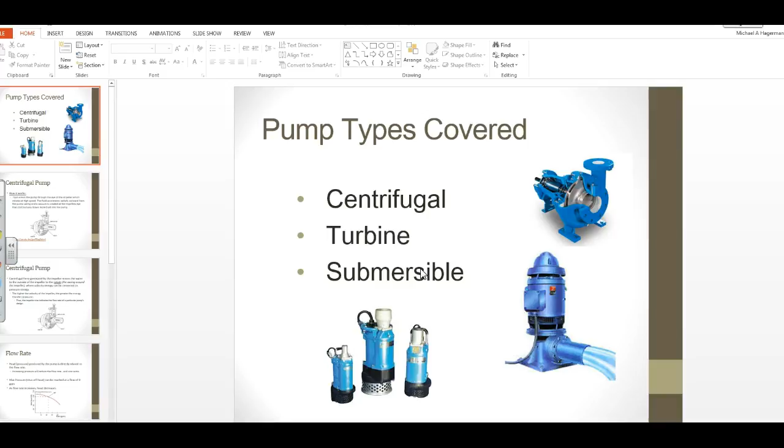So again, they all work with centrifugal force. I think we're all fairly aware of what centrifugal force is, but basically it's the force created with a circular movement - the further out from the center, the greater the centrifugal force. So the larger the diameter of the bowl assembly, that intake unit, this is the bowl right here, the larger that thing is, the greater capacity we have with that pump.

Of course, larger bowls will generally require larger horsepower, more power to drive the things. Fluid enters the pump - the water is going to enter through the eye of the impeller, which is just the center point. Oftentimes I use impeller and bowls interchangeably, that's pretty common. So this is the impeller, and this is the eye of the impeller where the fluid enters.

Of course, that bowl is rotating. Water is going to be, the centrifugal force moves the water outward, and the casing area on the outside of the bowl or the impeller, this furthest exterior area is called the volute. So the pressurized water is sent to the volute, and that centrifugal force moves the water out. Simultaneously, we're creating areas of lesser pressure where our velocities are the highest, which is actually just on the back side of the impeller fin - I was talking about velocity and pressure relationships.

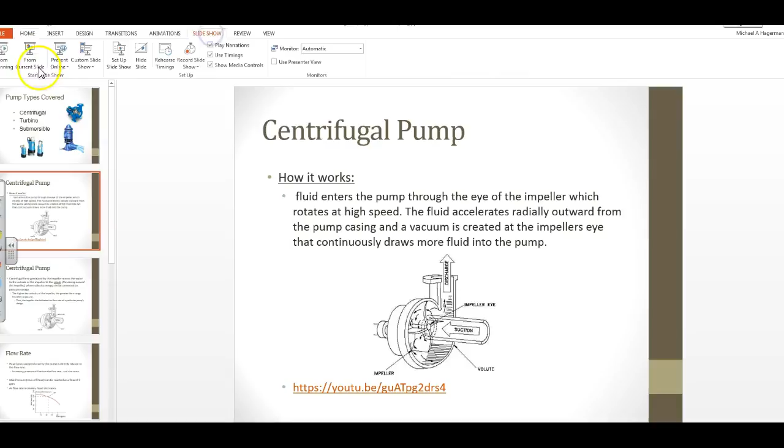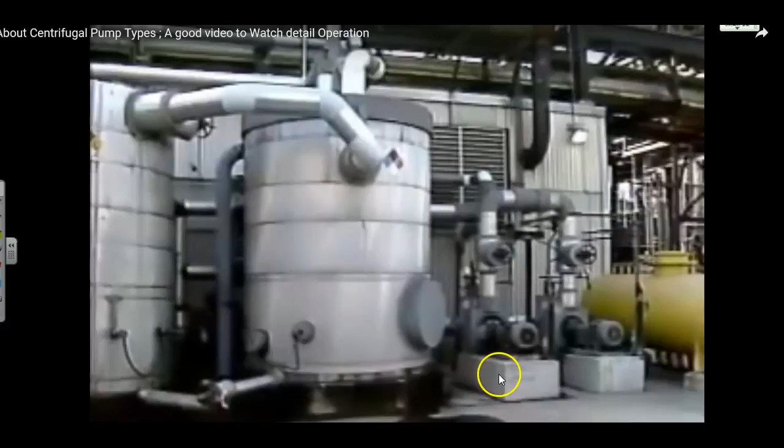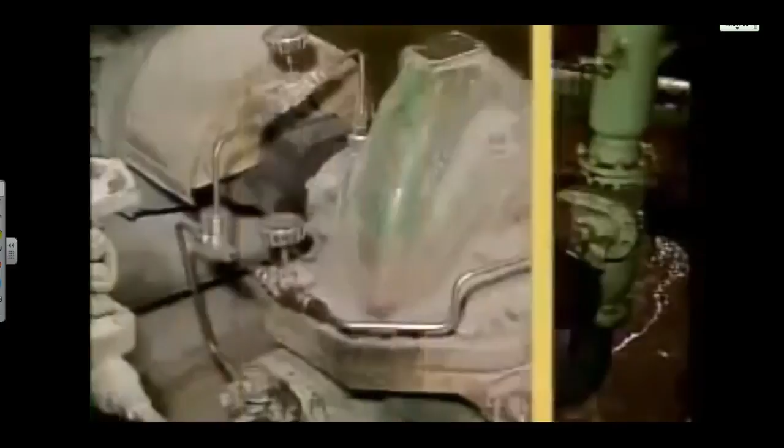Plants use many types of pumps to move process liquid. One of the most common types of pumps in use today is a centrifugal pump. A centrifugal pump uses one or more impellers to create a centrifugal force that pushes the process liquid through the pump. While there are different types of centrifugal pumps, they can be grouped into two basic categories: single-stage pumps and multi-stage pumps.

A single impeller or multiple impellers use centrifugal force to move liquids. Centrifugal force is the force that exists when an object or material moves in a circular motion. This force causes the object or material to move outward, away from the center of rotation. In a centrifugal pump, what moves outward is the process liquid.

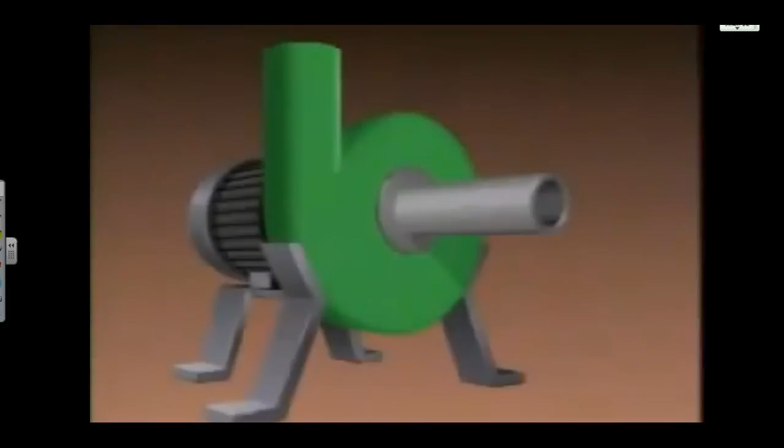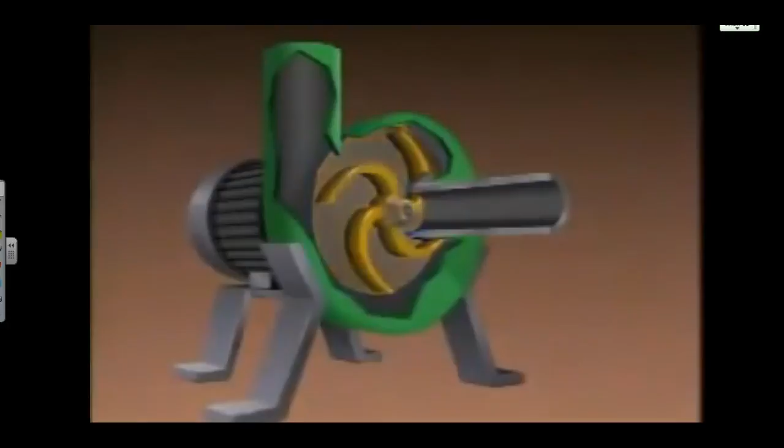We can see how a centrifugal pump works using this simplified illustration. All centrifugal pumps have an inlet, a casing, and an outlet. Inside the pump's casing is an impeller. It has a series of curved vanes that extend out from its center. The pump's casing is designed so that the area around the impeller creates a gradually widening spiral channel. This widening channel is known as the volute.

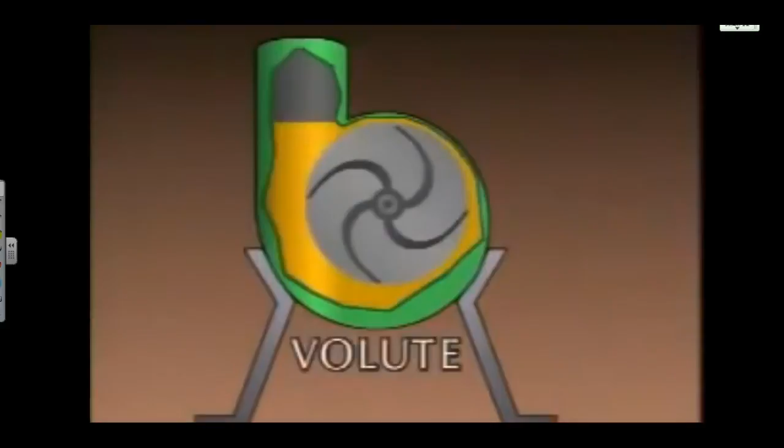Since this pump has only one impeller and one volute, it is referred to as a single-stage pump.

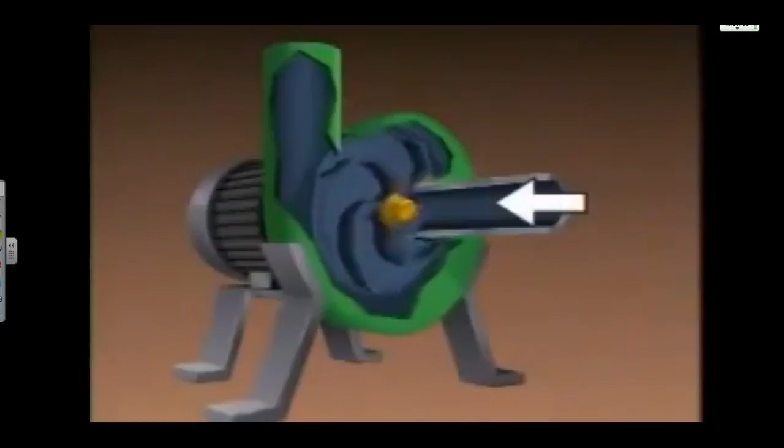During operation, a driver motor rotates the impeller, creating a centrifugal force that throws the process liquid outward into the volute. The outward movement of the liquid causes two things to happen. First, it creates a reduced pressure area at the suction eye of the impeller. This area of lower pressure draws more liquid into the pump and provides a constant flow of liquid. Second, it causes the liquid to gain speed.

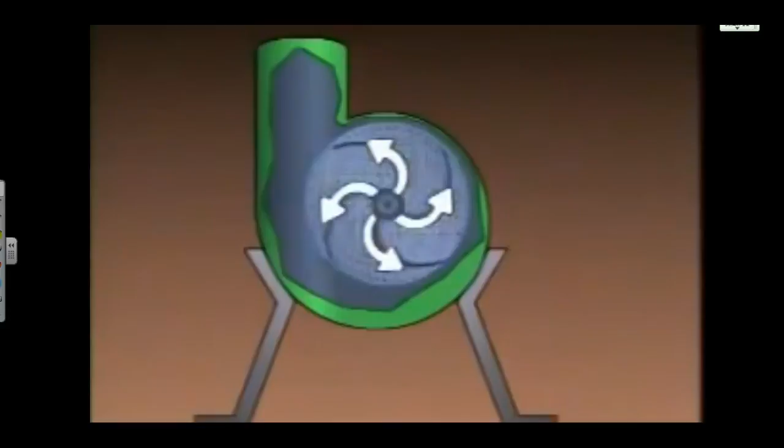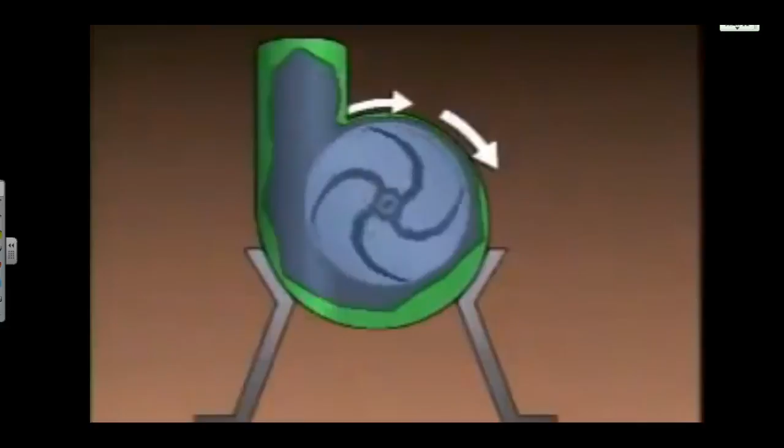This happens because as the liquid is forced to the outside of the rotating impeller, it must move faster to keep up with the impeller. As the liquid flows away from the impeller, it spreads out to fill the volute. The expansion in the volute causes the liquid to slow down and its pressure to increase. The increased pressure moves the liquid through essentially a transition from high velocity to high pressure.

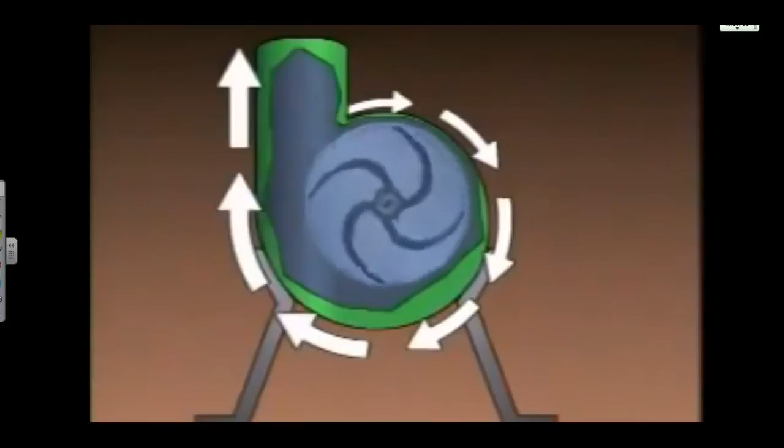One way that centrifugal pumps can be categorized is by the way liquid flows through. Three common flow path classifications are radial flow, axial flow, and mixed flow. In centrifugal pumps that have a radial flow design... this isn't stuff you guys need to remember for this course, I just think this guy does a good job.

Liquid flows radially from the suction eye to the tips of the vanes. A radial flow pump takes advantage of the maximum amount of centrifugal force that the impeller develops. Generally, radial flow pumps are capable of higher discharge pressures, but they don't move as much liquid as other types of centrifugal pumps.

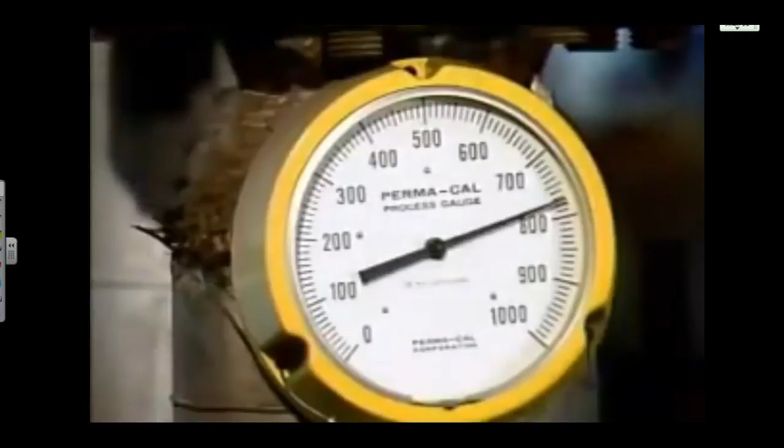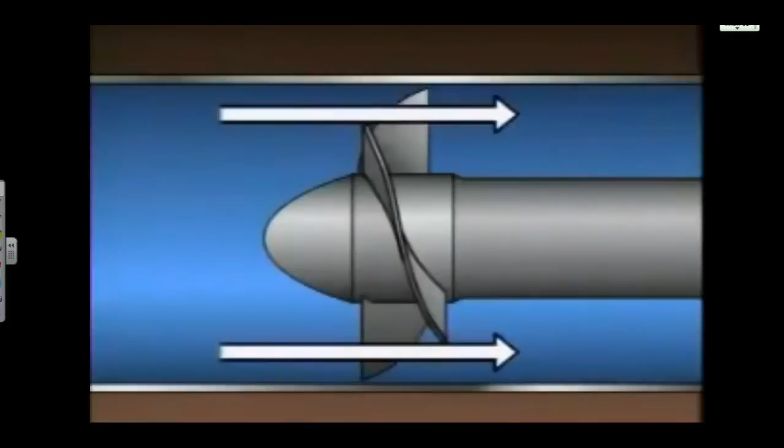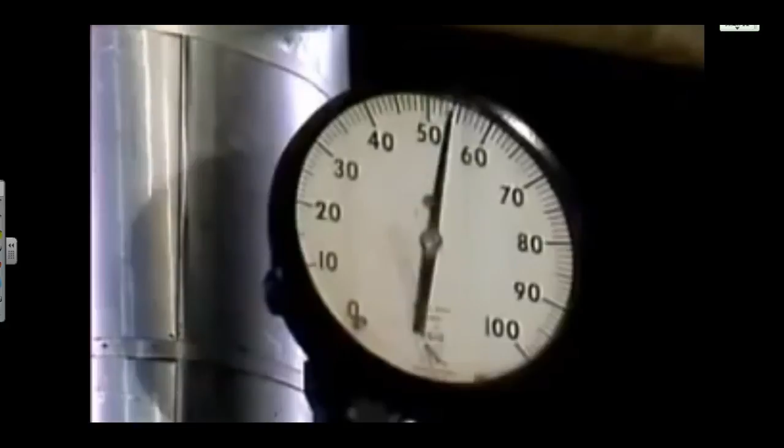In centrifugal pumps that have an axial flow design, the impeller moves the liquid through the pump along a path that's parallel to the pump shaft. In this type of pump, the liquid is moved mainly by the propeller action of the impeller's vanes. This impeller uses only a small amount of centrifugal force to move the liquid. As a result, the discharge pressure of an axial flow pump tends to be lower than that of a radial flow pump. However, an axial flow pump may be able to move large quantities of liquid.

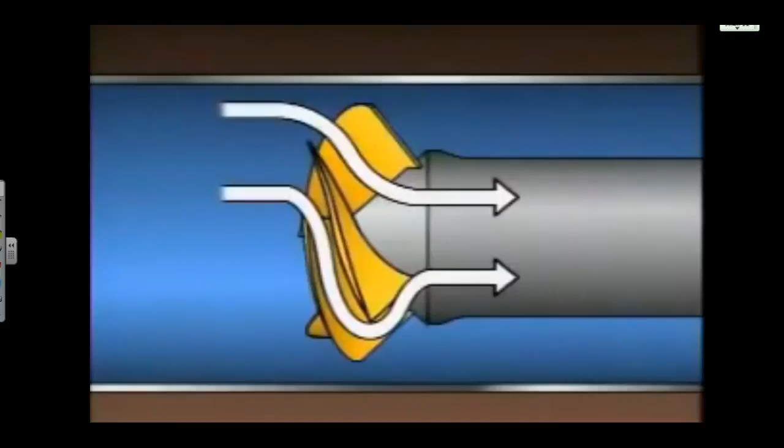Mixed flow pumps combine the characteristics of radial flow pumps and axial flow pumps. They use centrifugal force and the propeller action of the impeller's vanes to move the process liquid. For that reason, a mixed flow pump can develop a relatively high discharge pressure and still move a large quantity of liquid.

In some instances, it's often necessary to keep a pump driver above the liquid while the pump is submerged in the liquid. One type of centrifugal pump you may find in these applications is a vertically mounted centrifugal pump, or a turbine pump.

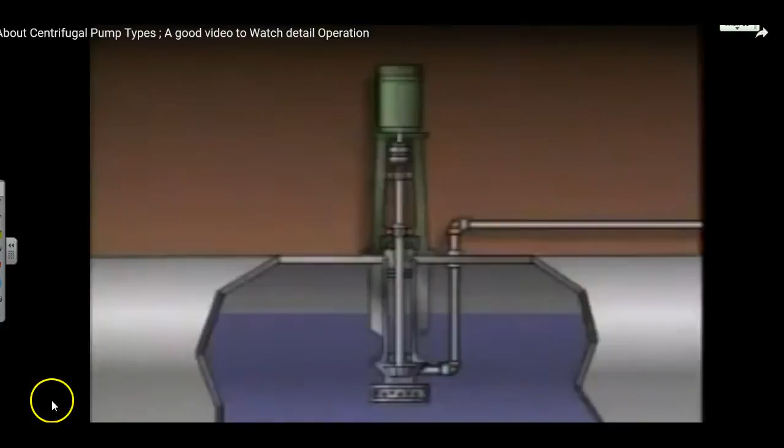Of a vertically mounted centrifugal pump and its driver to see how this type of pump works. The pump itself is submerged in a tank containing the liquid being pumped. The driver, which is an electric motor, is mounted above the pump on top of the tank. Its shaft is connected to the pump shaft by a coupling. This pump shaft is much longer than those found on most other centrifugal pumps.

On any pump with a long shaft, it's important to keep the shaft in its correct position so that the pump will operate properly. So several bearings are used to keep the shaft properly aligned.

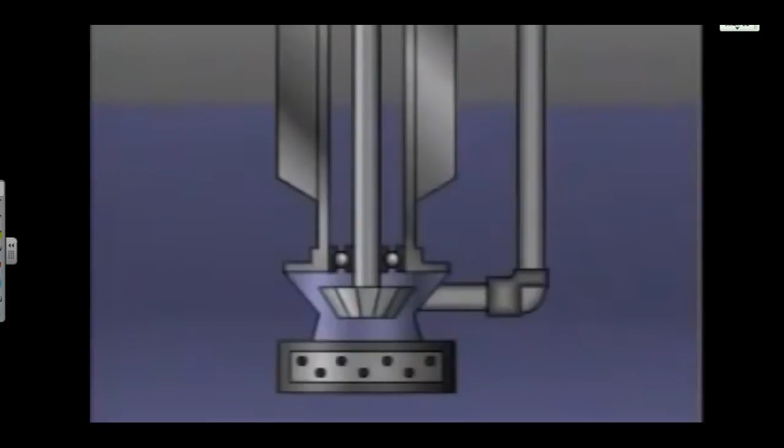Now on this pump, there is no suction pipe. Instead, the suction of the pump is submerged in the liquid being pumped. The suction is covered by a strainer, which prevents trash or debris from clogging the pump and causing excessive wear. The pump's impeller is also submerged in the liquid. This helps to ensure that the pump is always primed. This means that the casing is filled with the process liquid.

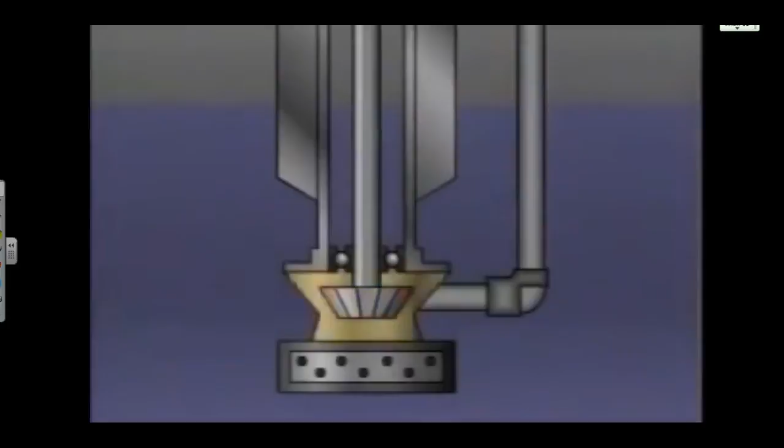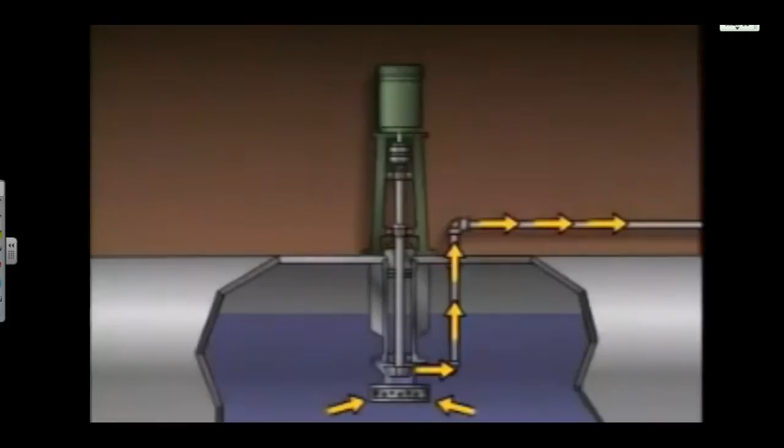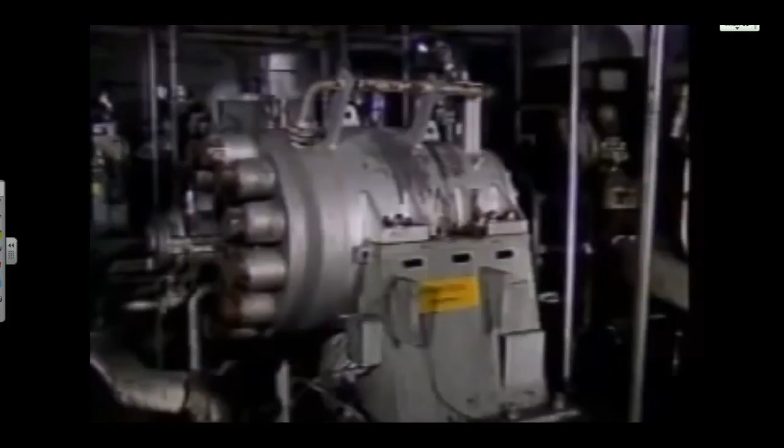And then pumped through the discharge piping, which extends up and out of the tank. All centrifugal pumps work by creating a centrifugal force. This force moves the liquid through the pump and increases the liquid's pressure. In applications where large increases in pressure are needed, multi-stage centrifugal pumps are often used.

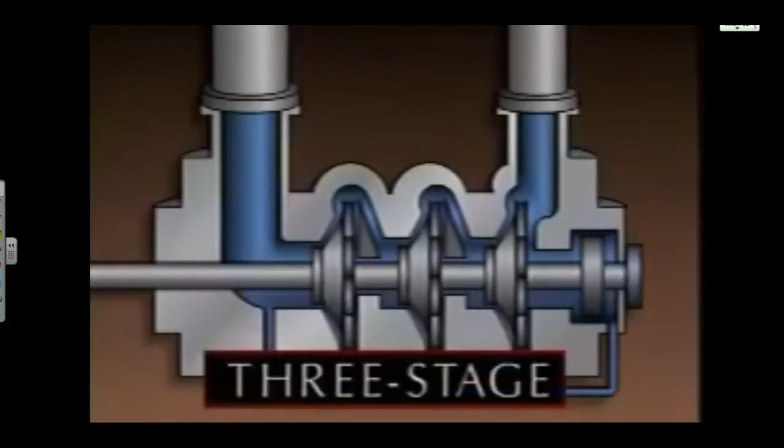A multi-stage centrifugal pump contains two or more impellers and volutes in a single casing. Here's a simplified cross-section of a three-stage centrifugal pump. Each stage of the pump has its own impeller and volute. In the volute, the liquid's pressure increases.

Each of the first two volutes discharges into the suction eye of the stage that follows it. The third stage volute discharges into the pump's outlet. So in this pump, the liquid flow path is from one end to the other.

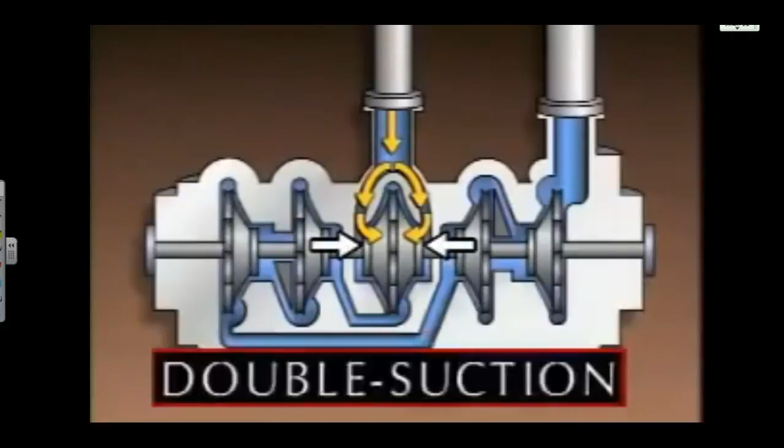In this pump, liquid enters through the suction and flows into the impeller of the first stage. This impeller has a suction eye on both sides and is often called a double suction impeller. From the discharge of the first stage volute, the liquid flows into the second stage suction eye.

Then out of the second stage discharge and on to the third stage suction eye. And out of the third stage discharge to the suction eye of the fourth stage.

I wonder what the advantage of sending it back like that versus keeping it in line.

To the suction eye of the fifth and final stage. After the liquid passes through the fifth stage, it leaves the pump through the discharge piping.

Regardless of how the impellers on a centrifugal pump are arranged, or how many stages a pump has, the liquid's pressure increases as it passes through each stage. This creates a thrust across the impellers in each stage.

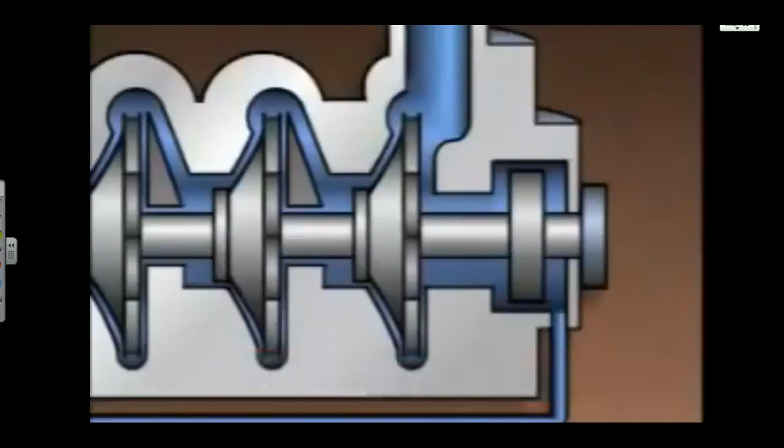In order for the pump to operate properly, the thrust must be offset. On some pumps, the thrust is offset by using a thrust bearing or a device known as a balance piston or balance drum. On other pumps, the thrust is offset by the arrangement of the impellers.

This pump has a balance piston. During operation, some of the fluid leaving the pump flows along the shaft and exerts pressure against the balance piston. That pressure tends to force the pump shaft away from the suction eyes and reduces the total thrust. Any fluid that passes by the balance piston is returned to the suction side of the first stage.

Now on this pump, the arrangement of the impellers is used to offset axial thrust.

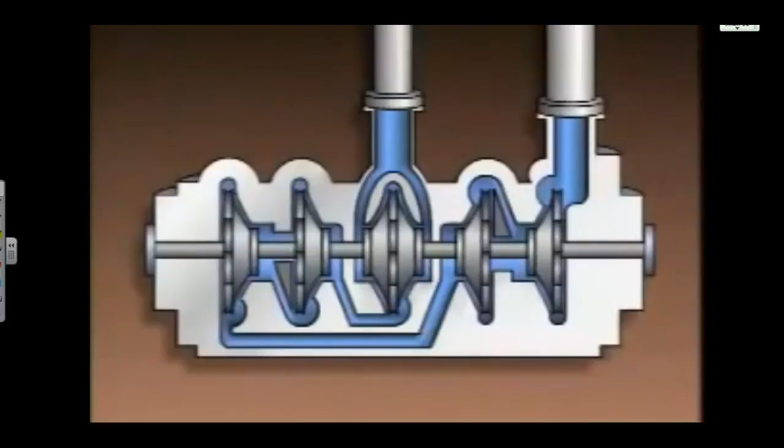Okay, I think this is interesting, but we really don't need to cover that anymore. The pressures on both sides of the impeller are... Okay.

Okay, I think we covered that. But again, remember, the higher the velocity of the impeller, the greater the energy transfer becomes into pressure.